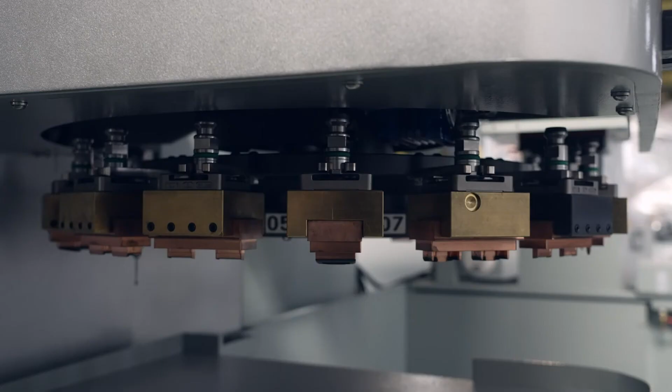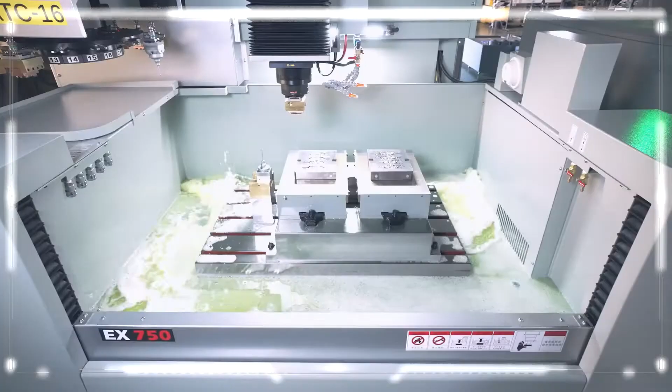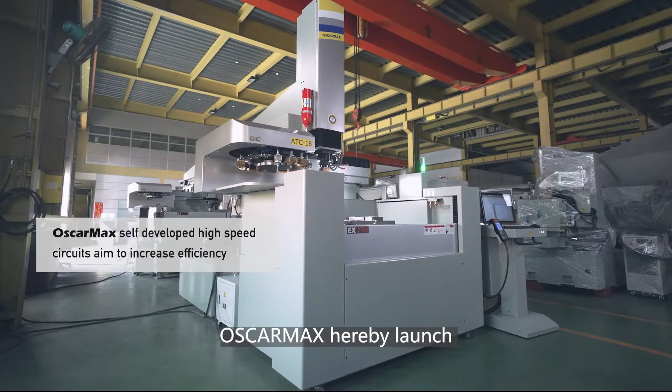With constancy of developing, testing, and improving, Oscarmax hereby launches the latest sinker EDM, combining a strong rigid machine body, EtherCAT ultra-fast communication system, and user-friendly interface to bring extraordinary performance.

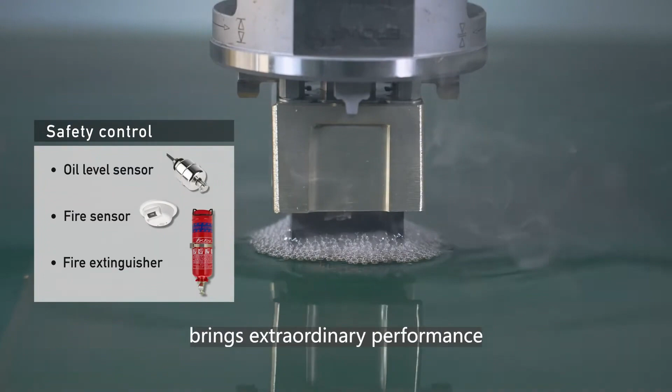Prompt response between driver and servo motor achieves precise positioning, with stable current output for better accuracy and surface roughness.

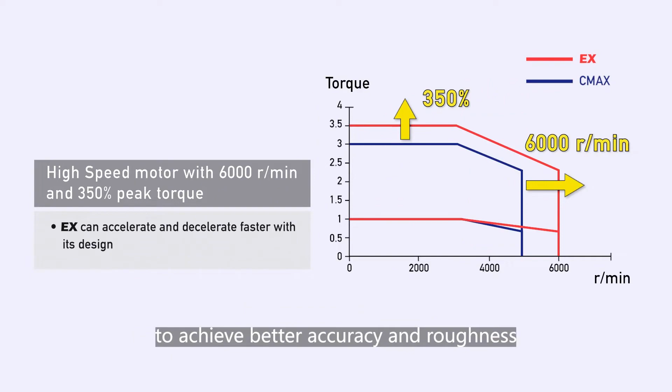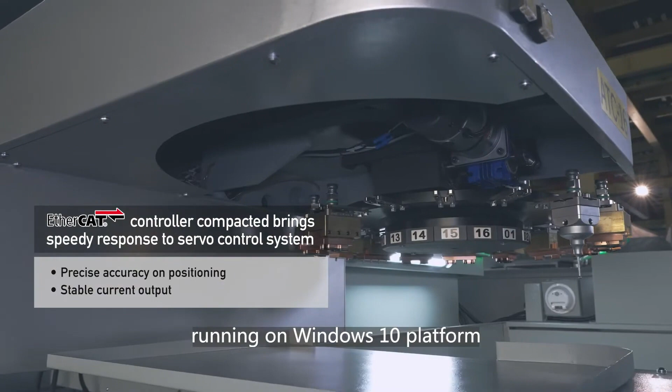With a self-designed user interface running on the Windows 10 platform, the system is eligible to process CAM software output through API, bringing prep time and possible human error to a minimum.

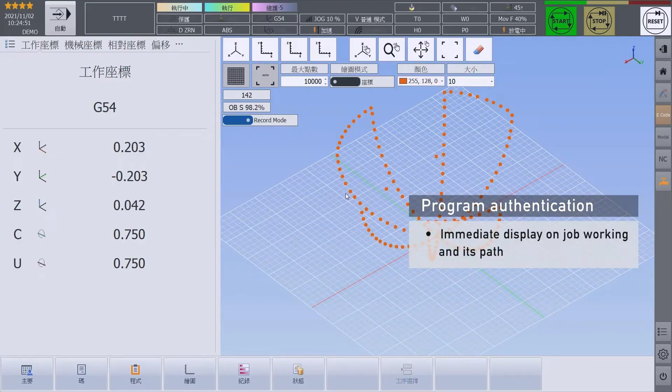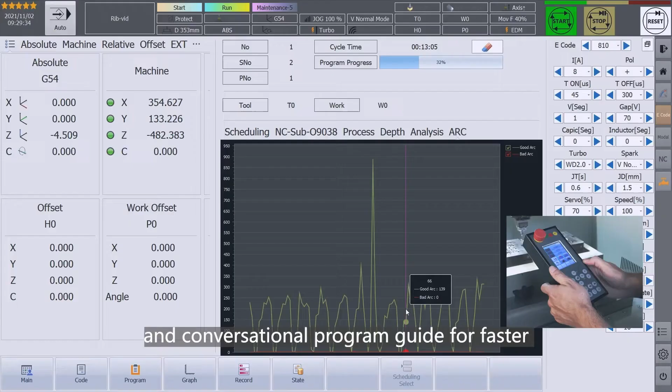Eco Standby Mode, equipped with a motion sensor, saves power. The interface features graphic 3D icons and a conversational program guide for faster, easier operation, with 2 touchscreens designed for better ergonomics.

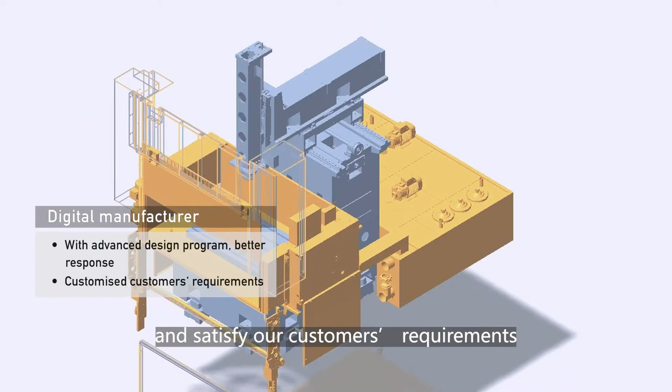All series are designed using parametric software such as ePlan, Creo, etc., integrating with the production team to satisfy our customers' requirements.

Ready to link automation, it connects with a central control system to create an automatic production line. Through the API system, it can also be easily adapted to other platforms.

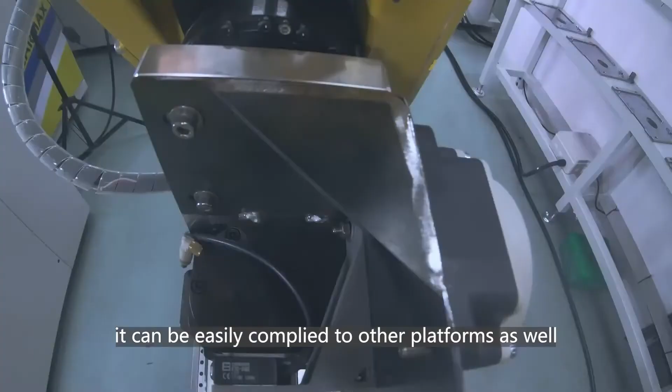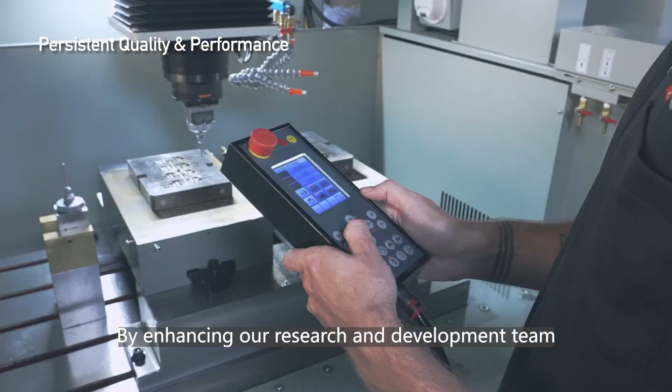By enhancing our research and development team, we aim to continue improving our EDM to meet your requirements, and we believe that together we bring the industry to a new generation.